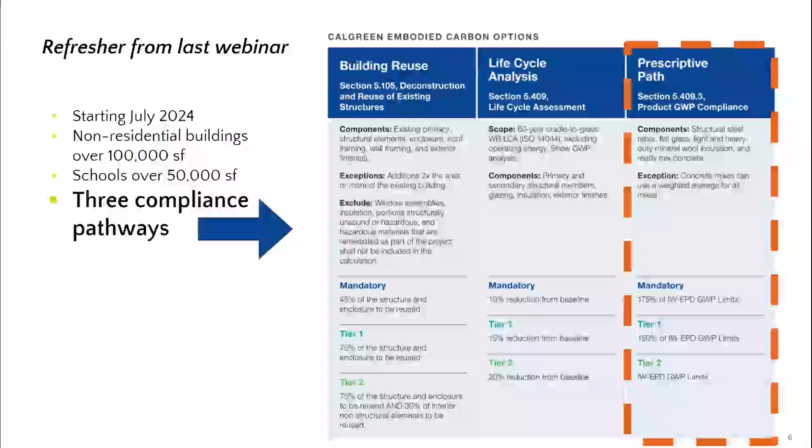So just a little bit of a refresher from the last couple of sessions. CALGreen is going to be starting July of this year, right around the corner, getting pretty exciting. It's going to be applying to buildings over 100,000 square feet, non-residential buildings, and schools over 50,000 square feet. And there will be 3 compliance pathways. So our first webinar was all about kind of an overview of the 3 pathways, and these subsequent webinars are more of a deep dive. So be sure to check those past recordings, and as well, all the resources that we've been sharing on these webinars will be saved there.

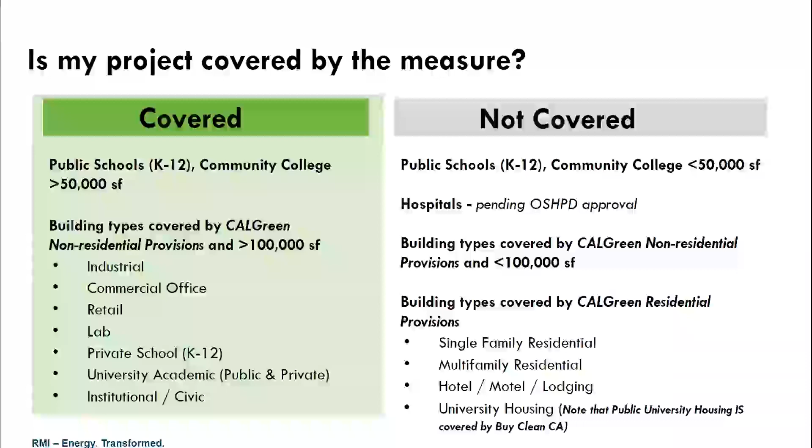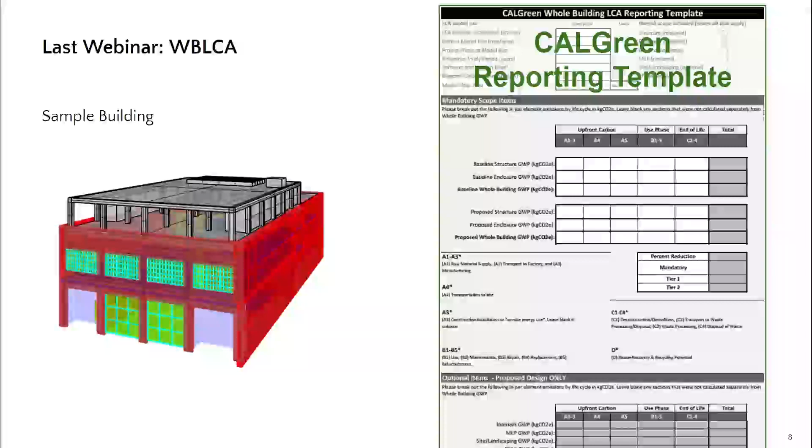In the first webinar, we got a lot of questions about what's covered, what's not covered. We continue to be developing resources with AIA and SEAOC. And again, keep referencing those pages, and there's a lot of work behind the scenes and a lot of people pulling this information together. Last time we had a great group talking all about whole building LCA, which is a topic that is definitely growing in interest in the industry, and I think with this code it will only get more and more important. We talked a lot about the reporting template required of that, and went through the whole process of how you include that in your drawings and specifications, and noting that that's required at permitting.

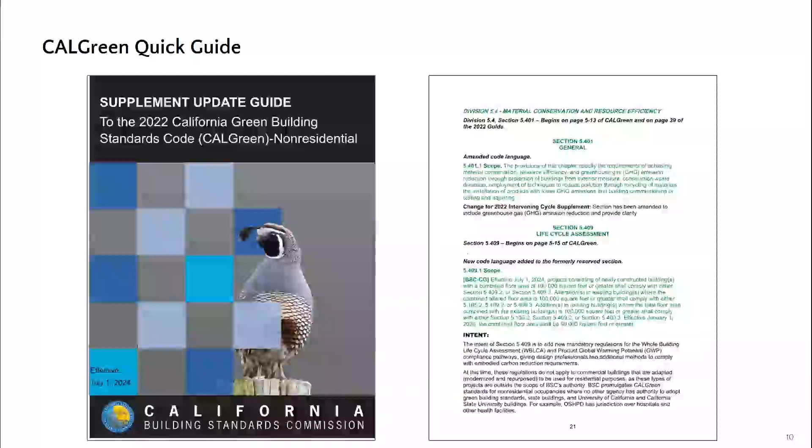Since we last spoke, there's been a CALGreen quick guide that was published. This outlines all the code language, provides the worksheets, is a really great resource. Sarah's gonna help us out and drop a link to that in the chat, I believe.

And today we're gonna have a little bit different style here. It's a little bit more freeform. We have a really wonderful group of industry experts here. And we're going to be diving into procurement strategies for the materials that are included in CALGreen. And with procurement, it's largely about awareness and collaboration between the design team and construction teams.

In that light, we have a pretty big panel of industry experts trying to cover those different materials. We have structural engineers like Salma, architects like Hafsa and Burt, as well as folks on the construction side, Jesse Buckmaster and Sophie Pinetier, with a perspective on facades. And as well, I think a really important perspective from actual material manufacturers and suppliers, Dave Wright and Jim Little. And I will say, it's a big group here, and I'm not going to go into deep detail on everyone's bios - check the event page for that, along with the other resources.

And it's going to be a little bit more ad hoc discussion here. Lots of important perspectives to shed light on this topic.

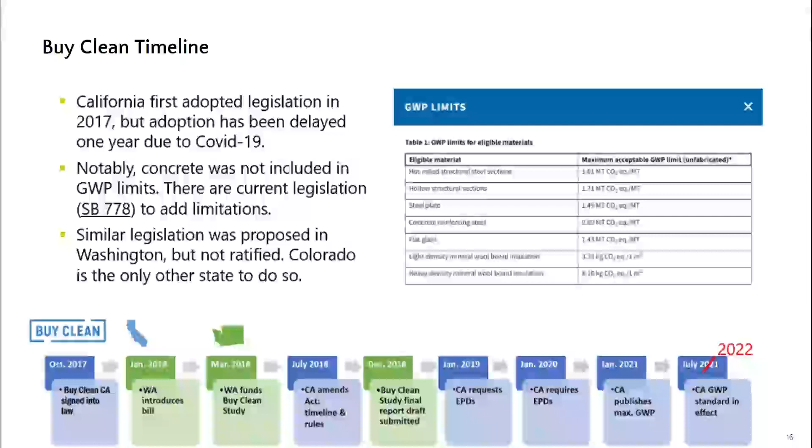If you go to the next slide. One of the big differences between CALGreen and Buy Clean is that ready-mix concrete has been added to the list of affected materials. So you'll see everything else on this slide is the same as Buy Clean. In addition, we have ready-mixed concrete. And for ready-mixed concrete, and we'll go into this much more in detail when Jim goes into detail on concrete, essentially ready-mixed concrete has a few exceptions here in the code because it's a bit more complex than some of the other materials.

Let's say you have 4 or 5 different concrete mixes on your project. CALGreen's prescriptive pathway allows you to take a weighted average of the impacts of all of those different mixes, to be able to come up with one GWP number. So you're not necessarily looking at them in silos the way you are with the other materials, just by individual element. You're looking at them as concrete mixes as a whole on your project.

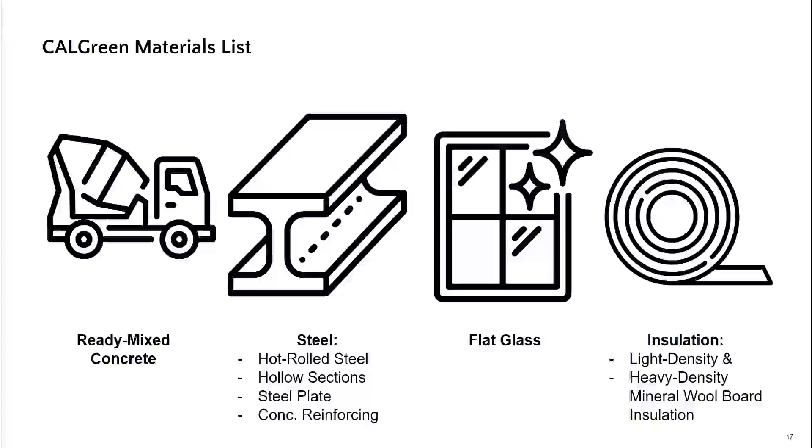So we talked about Buy Clean requiring industry average GWP limits be met. For CALGreen, the mandatory requirement is 175% of the industry-wide average EPD limits. So 1.75 times the limits that were shown in the Buy Clean slide. If I'm being honest, that's a really low bar. It's going to be very easy to meet those requirements to be within 75% more of the industry-wide average. So we suspect that this pathway is more of a record-keeping exercise than anything. We'll just need to have EPDs that prove that all of our affected materials are being produced within this 175% industry average GWP limit. And once we have those EPDs, we don't suspect it to be very difficult to meet those requirements, but having those EPDs are going to be kind of the push for this pathway.

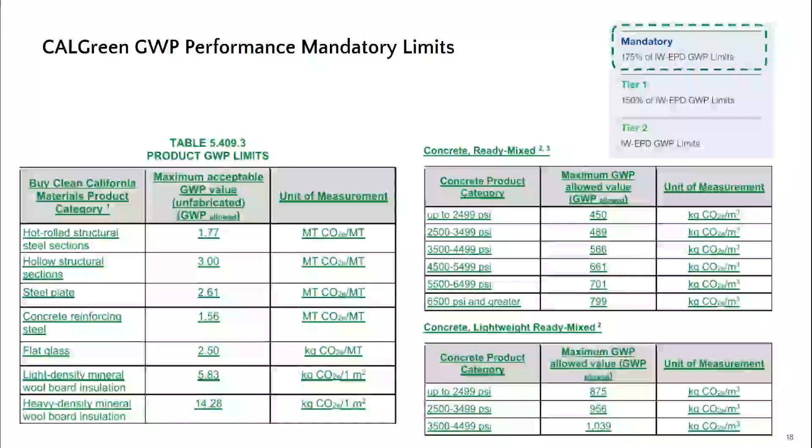So I've been saying EPDs a lot. I'm sure in the last few webinars the phrase has been mentioned and probably introduced, but to give you a little bit of an overview of what EPDs, or environmental product declarations, are - they're essentially the way that we're able to quantify the impacts of our various materials on our projects.

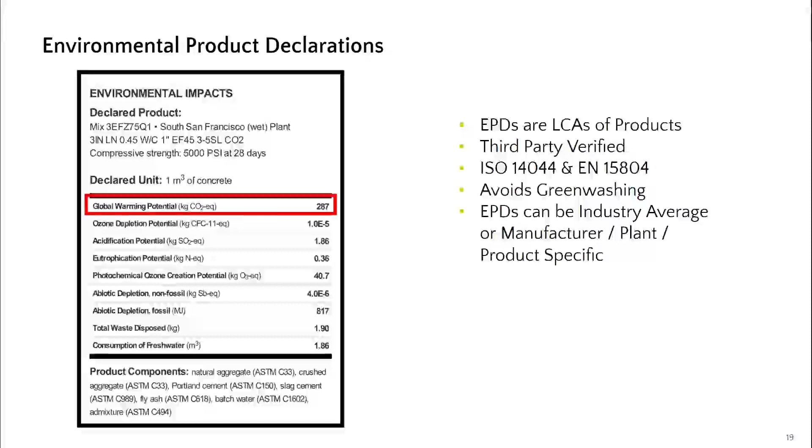We won't talk too much about LCAs during this webinar because the previous webinar was pretty heavy on LCAs, but I just wanted to note that EPDs essentially measure cradle to gate emissions - meaning the emissions associated with the product stage of a material's life, from the time of raw material extraction through the time that material leaves the factory gates. That's what the EPD is measuring.

And then the EPD data essentially gets fed into LCA tools to be able to perform these studies that we do for, say, if you were following the performance-based pathway and doing a whole building LCA.

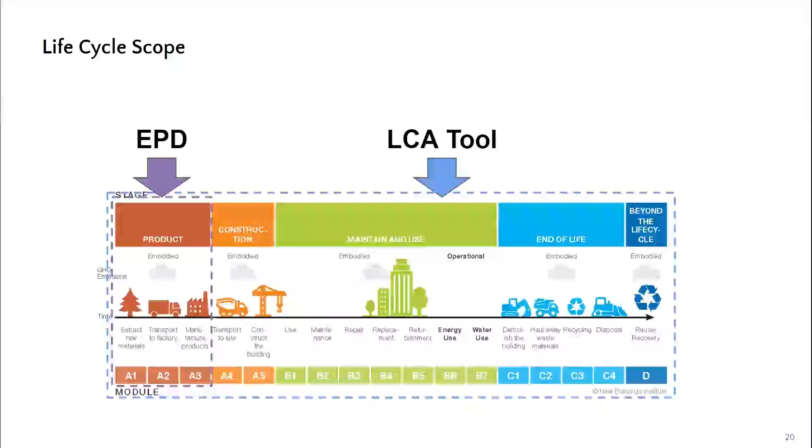So there are two main types of EPDs we want to make you aware of: industry average versus product-specific or factory-specific, which we've grouped into one more granular type compared to industry average. The industry average EPDs are developed by industry organizations like NRMCA or AISC - they collect data from their constituents and share the average impacts associated with those various materials. Whereas the product or factory-specific EPDs are published by individual manufacturers for their specific products.

So in order to satisfy this prescriptive pathway of CALGreen, you will need all of your affected materials to basically have product or factory-specific EPDs. The industry average EPDs won't be acceptable - you'll need to have product or factory-specific.

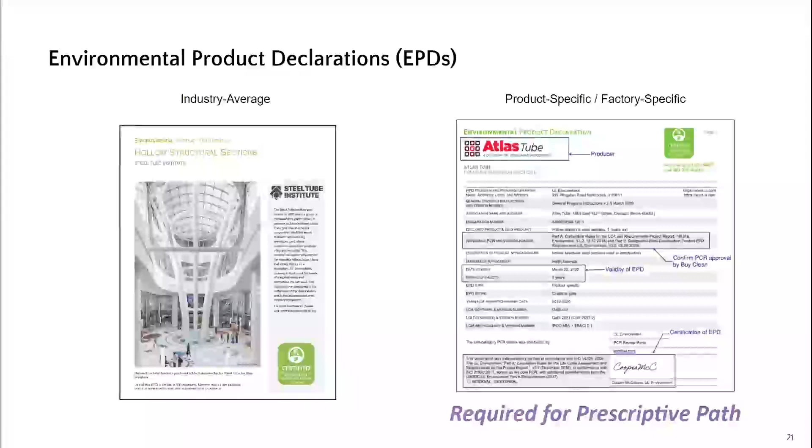I would add one thing here, a quick distinction following up from our webinar last time. I think it's really important to keep the two pathways separate - whole building LCA and the prescriptive, more like Buy Clean approach. Last time we talked a lot about reducing, getting to that 10% reduction by using low carbon product procurement - that's reduction from the baseline, from that average. What Salma has been saying is that the threshold now for the prescriptive approach is a much higher number, much more conservative - we're not reducing from that higher 175% average number. So it's important to keep those two distinctions in mind.

With that, we'll transition to a bit of discussion about the responsibility of the design team, both structural engineers and architects, requiring that there be some documentation. Similar to the whole building LCA approach, there's a worksheet to be filled out and included - and this is being done at permitting, submitted with your permit application. I wonder, Hafsa, if you could speak a bit more about this process and how you see it impacting architects and engineers.

Yeah, appreciate that, happy to be here. Usually contract documents consist of drawings and specifications, and sustainability requirements are covered in 01 81 13 of Division 1 in CSI format, if you're doing specifications. For those of us who have been doing LEED certification projects for years, we know that all sustainability requirements - like standards, if it has to qualify for South Coast Air Quality Management District for low emitting materials, etc. - all references are included in Part 1 of Division 1 of CSI.

And including the action items, like what the contractor is required to do - if he or she is supposed to submit an action plan within 30 days of going into contract, what's the action plan for procuring these materials, and then what's the process of actually documenting that these materials were procured throughout the process, tied in with progress payments. So that's one, it's detailed.

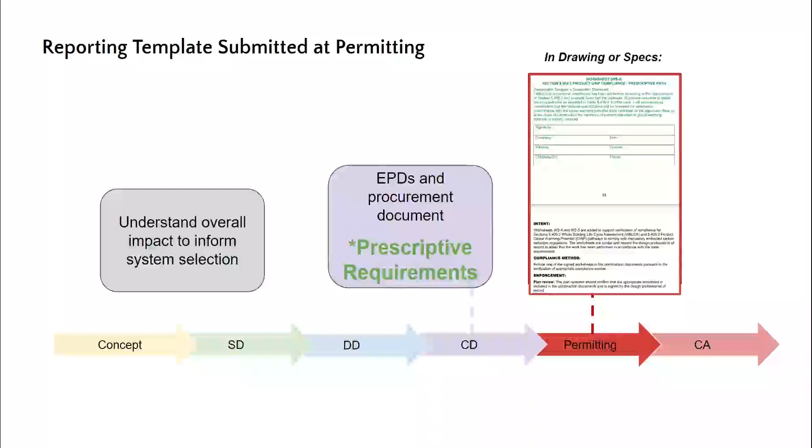Excellent, thank you. Yeah, and let's get into it. Dave, let's start talking a little bit about steel, from a fabricator role, as someone who actually is purchasing these products. Yeah, sure, Luke.

Thank you. And I'll start by saying thanks for the opportunity to come speak about my favorite building material of choice, structural steel, here today to such a great audience. So I'm going to cover a handful of things in the next couple of slides and try to do it quickly.

And you see toward the bottom, globally right now they are still accounting for about 70% of the total raw steel, crude steel produced in the world.

On the right-hand side is the newer method, really refined in the last say 100 years, the electric arc furnace, or EAF method, also known as a mini mill. Those traditionally use a very high content of recycled steel. So your bicycles, cars, washers, dryers, things such as that are going into these, anywhere from 93 to 97% recycled content, with the fill-in being other alloys added to get the right material grades and properties. You've got much less emissions being put out from these.

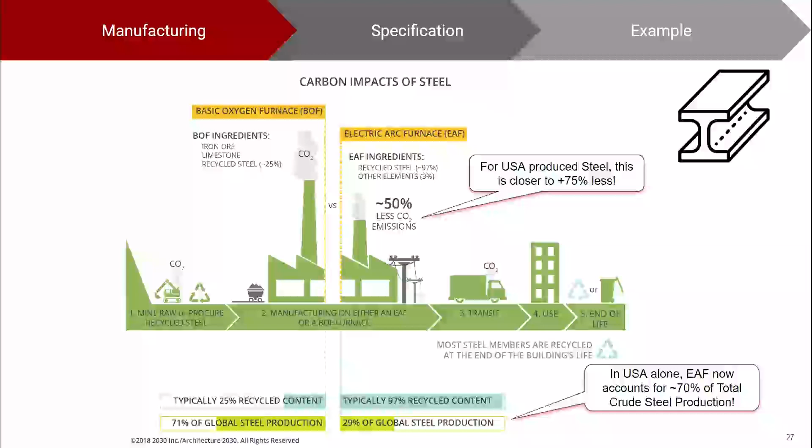So as Jesse and Salma talked about before me, what can we do when specifying materials? Consider discussing those as early as you can with your general contractor, your owner, your construction manager, and where possible, if the design team or construction manager is able, bring in and look at your local steel fabricators and suppliers in the area who might be most suited to bid on your project or supply quotes, and get their input as early as you can to help inform writing those specifications.

When you're looking at your project, we'd recommend, from a steel perspective, really focusing on what the primary materials are that make up your structure. Are they primarily going to be your hot rolled sections, your wide flange, your channels, your angles, or is it going to be a predominantly HSS or tube or pipe type project with a lot of hollow shapes, and similarly if you've got a job with a lot of plates?

Really understanding that kind of content is important, because in a minute we'll talk about how many mills are out there right now in the US producing with EAF that have facility specific or mill specific EPDs. That's another name for what Salma was describing and what Luke had described as material specific, but that term mill specific or facility specific, that's what we're looking for.

And you're going to see that for certain things, like hot rolled sections here in the US, the industry has responded well, and there's facility specific EPDs for pretty much all the big providers. Whereas on steel plate and hollow sections, there's maybe a lesser quantity of mills that have been able to obtain their facility-specific EPDs yet.

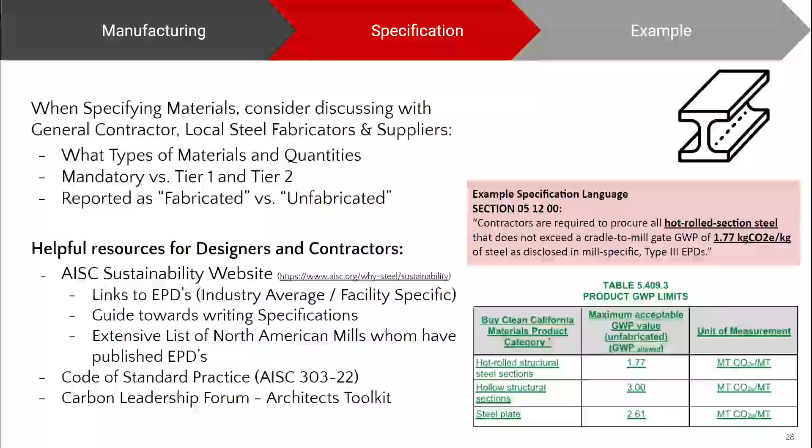All the materials, because it's one of the University of California schools, are required to meet the full Buy Clean California. Roughly about 300,000 square feet in total of new structure, with about 200,000 falling into the buildings we're providing, with about 1,400 tons of steel. Noted the lateral systems—it's a combination of concrete shear walls, BRBs, and special moment frames with RBS.

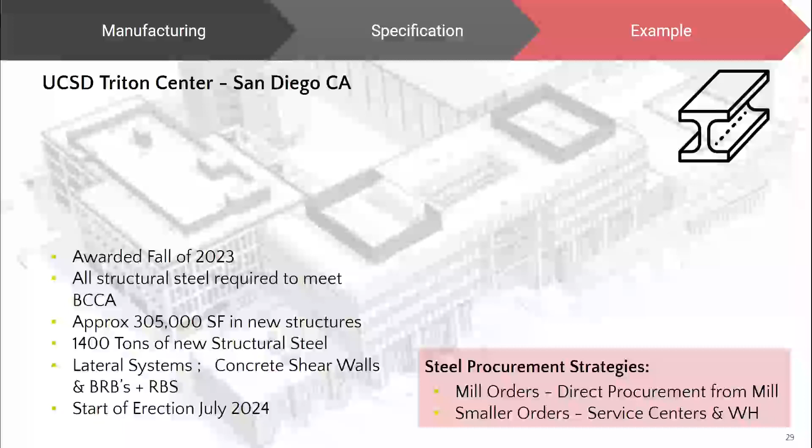What I wanted to point out on the next slide is a picture of both of the 2 primary steel buildings, the 5-story and the 3-story. We color coded these to make it stand out that all of the hot rolled structural sections—angles, channels, and wide flange—are in blue, with green being the hollow shapes, and that orange or yellowish color being the flat plate. As you can see visually, the lion's share of the steel in these jobs is in the hot rolled sections.

Again, no real challenges there when you're ordering in bulk from the mills, placing orders and being able to meet those Buy Clean California requirements. But where we really got into some challenges on this job is with the smaller quantities—the smaller plates, plates used as shear tabs and stiffeners. Normally for those items, there's not enough on your job to go to a mill and place a mill order for new material. You're typically partnering with your service center and local warehouses to obtain those smaller quantities.

Until the industry kind of flushes this out at these warehouses and service centers—where they're not bringing in steel anymore that doesn't meet, say, Buy Clean California, or doesn't have a facility-specific EPD—you're really at the mercy of what those service centers have.

So you're kind of playing the game where our steel purchasing agents, after being awarded a job, have to call up and verify what they have on hand, and can you send me the MTR so we can backtrack and see if that was produced at a place and time that had a facility-specific EPD. So some lessons learned on Buy Clean, but I think the upcoming CALGreen will offer some relief on those smaller quantities and hopefully improved flow.

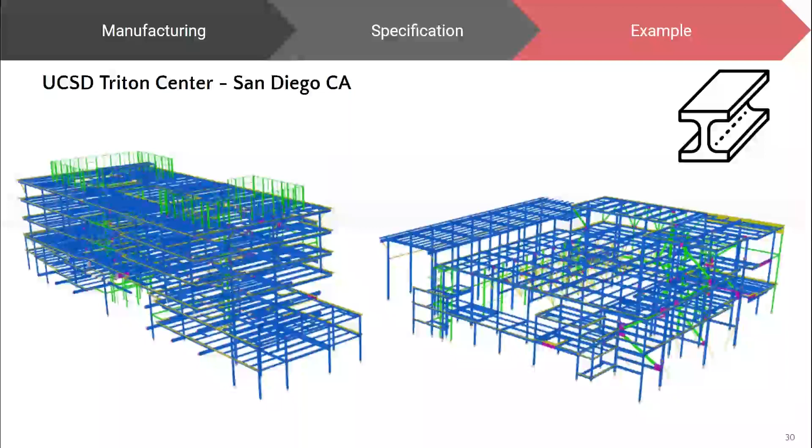It's going to be really critical, communicating those expectations early. Great. Okay, on to the next material. Jim, you're up, and thank you. I know it's a busy day for Jim, so appreciate your time and perspective on this.

Thank you, Luke. I think it's a busy day for everyone, but certainly an important topic. We've heard a little bit about early collaboration from Dave and from Jesse. As a ready mix concrete supplier, I think that's extremely important, as the capabilities of suppliers throughout the state, from north to south, the desert east side to the coastal west side, ready mix suppliers throughout the entire state and country have a wide range of capabilities, from materials, the sand and gravel they use, the chemical admixtures, the cement, and supplemental cementitious materials. All of those have a huge impact on what a supplier is capable of doing.

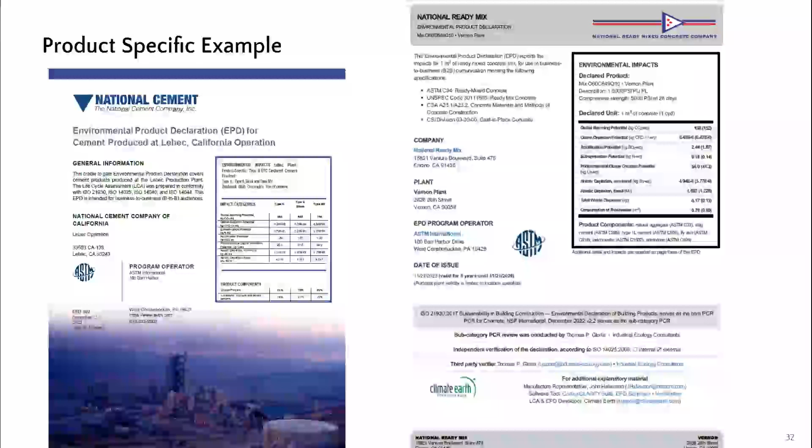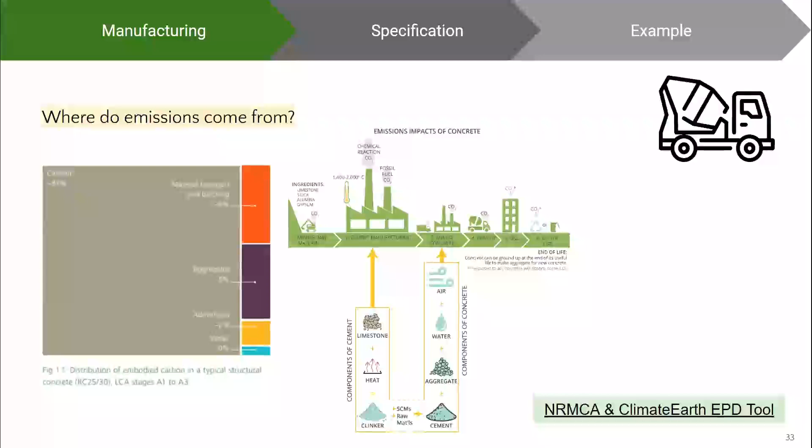With cement providing the highest contribution of global warming potential to a concrete mixture, that's an important aspect to look at. That's where a bulk of the emissions come from, that pyro process where we take the limestone and fire it in a kiln. So we need lots of energy to process that limestone to reach those high temperatures, and then the chemical reaction between the limestone releases the CO2. That's a bulk of the emissions produced in the cement making process, and that trickles down to a bulk of the emissions in the concrete.

This is just a little schematic of the cement manufacturing process, where the limestone is fed in. About 40% of the emissions come from the fuels that are used. Different cement manufacturing facilities have different options when it comes to fuels, whether renewable sources, fossil fuels, or a combination of both. Then there's the process emissions, which relate to how much clinker content is in the cement utilized. Typical type 2, type 5 cement used here in California is roughly 90% clinker, 5% gypsum, and 5% limestone, plus or minus.

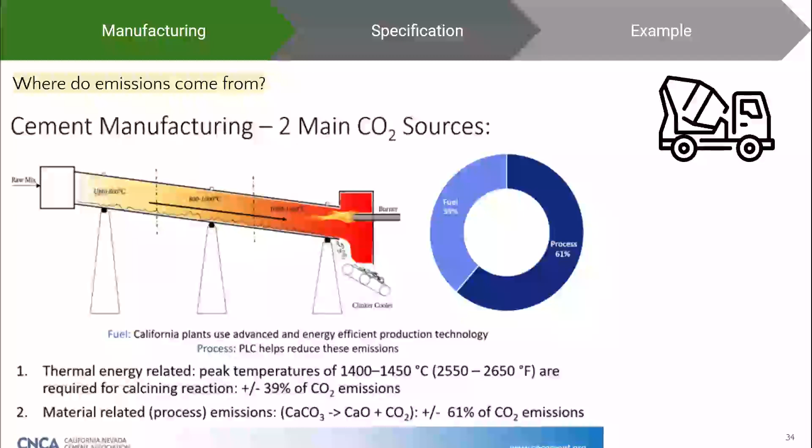When we start talking about different types of cements, blended cements meeting ASTM C595, such as type IL Portland limestone cement, those can be lower by up to 10%. So they may have a 15% limestone addition, giving you an overall 80% or so clinker content. So there's a big benefit right off the bat from looking at different types of blended cements. I think when it comes to the Buy Clean code, as discussed earlier, the limits are pretty generous, so it's real important to look at the intent of the code, which is to select a product with lower GWP impact.

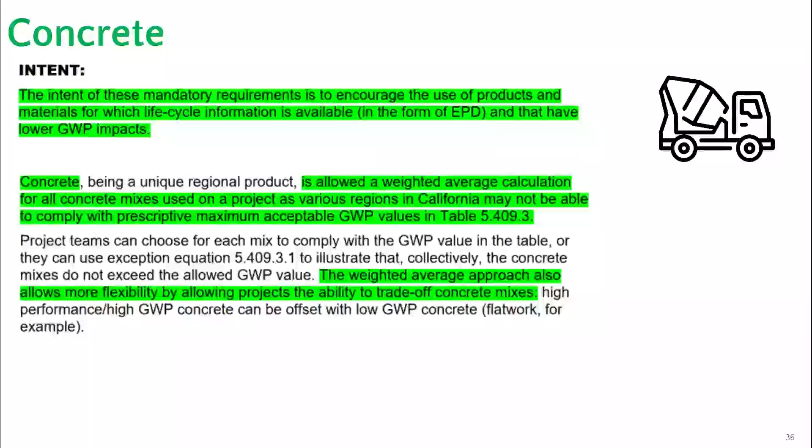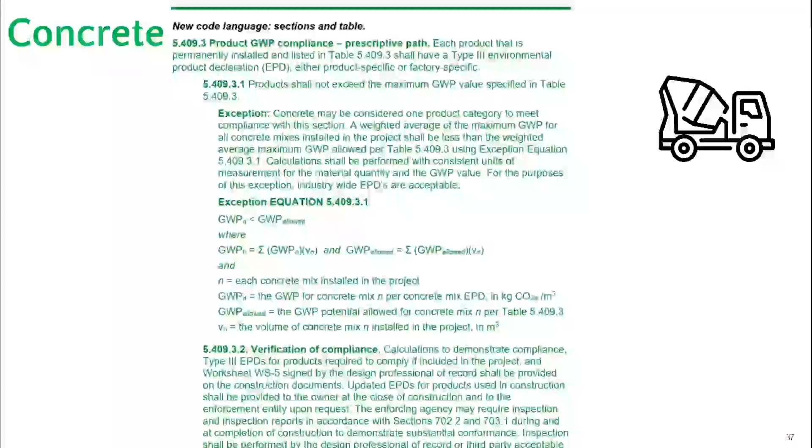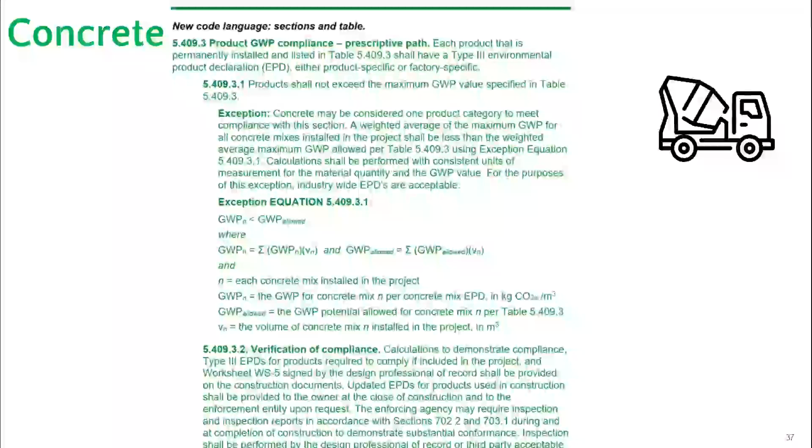I think if the intent is really the key focus there, some good things can happen. The great thing about concrete is that it's very dynamic, and we have lots of different options from various classes, from controlled low strength materials up to 10 and 12,000 psi concrete. So the ability to look at concrete as a whole using a weighted average calculation is a very beneficial option for us, and this is some of the code language here. I do have some examples of what that may look like, but it gives you the option to use the weighted approach, which really helps especially on the construction side, where perhaps there are elements that really need high strengths early on.

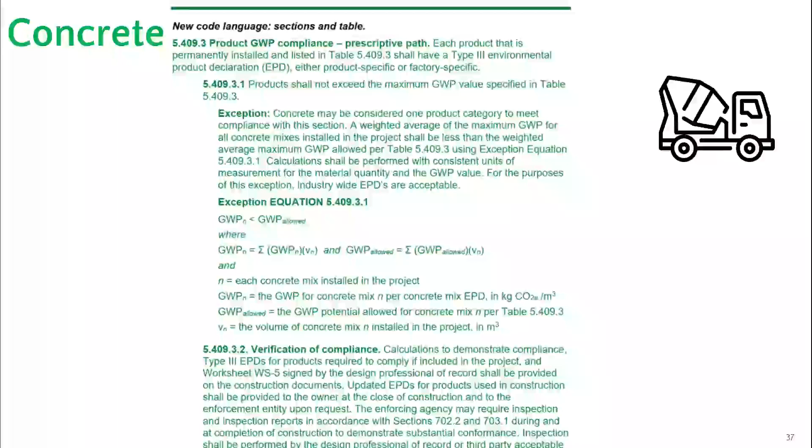And oftentimes when we do that, the GWP of the concrete mixtures are really quite elevated. Or the other side of that is if there's a specific lower water cement ratio required, that has the tendency to increase the global warming potential as well, as generally speaking, you will be using concrete mixtures with higher cement or cementitious materials.

In general, lightweight concrete has some natural lightweight materials, but there's also expanded shale clays and slates, which are pyroprocessed and do have a tendency to have higher GWPs. In addition, most lightweight concretes will have air, as air is the lightest thing we can put in there.

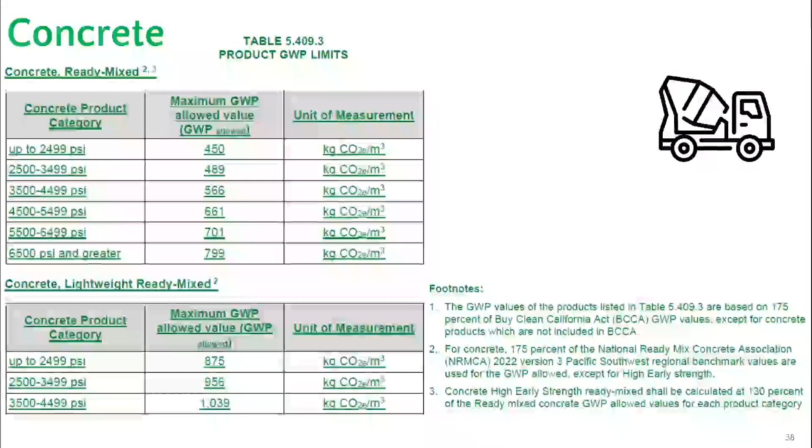And when we add air to concrete, it has a tendency to make it a little weaker, so we compensate with additional cement or cementitious materials. The other thing to note is that the product category table goes up to 6,500 PSI and greater, so as we see more 8, 10, 12,000 PSI concretes, they'll fall in that 6,500 PSI or greater table.

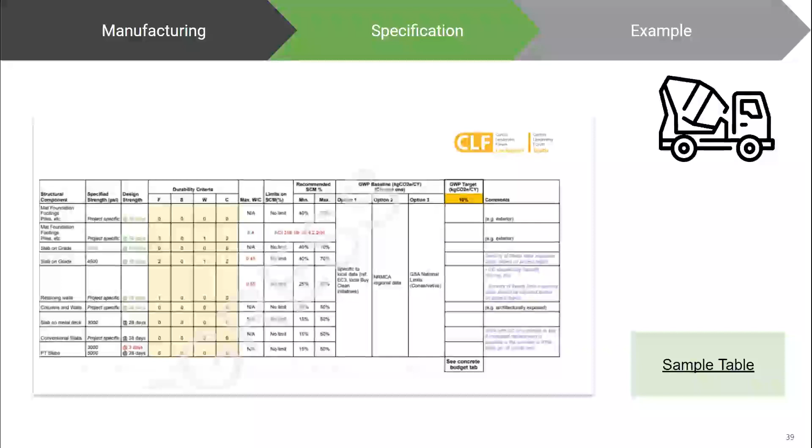So that's a great example to compare a project with CALGreen and with CLF. You can see there's lots of room there in CALGreen, but again, get back to the intent of the code, which is to select a lower GWP product.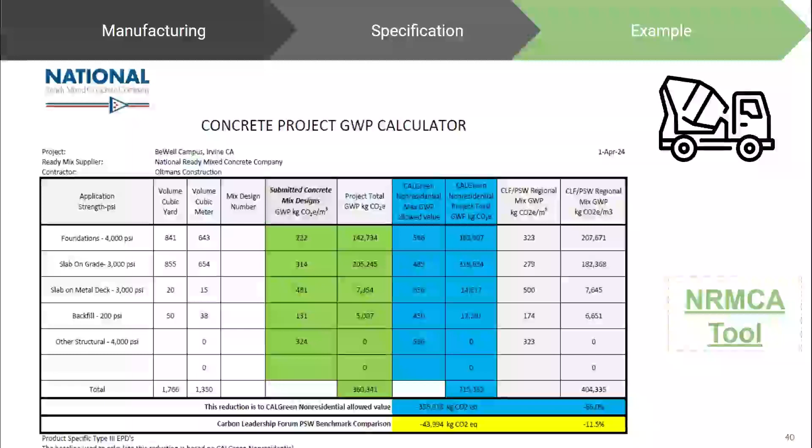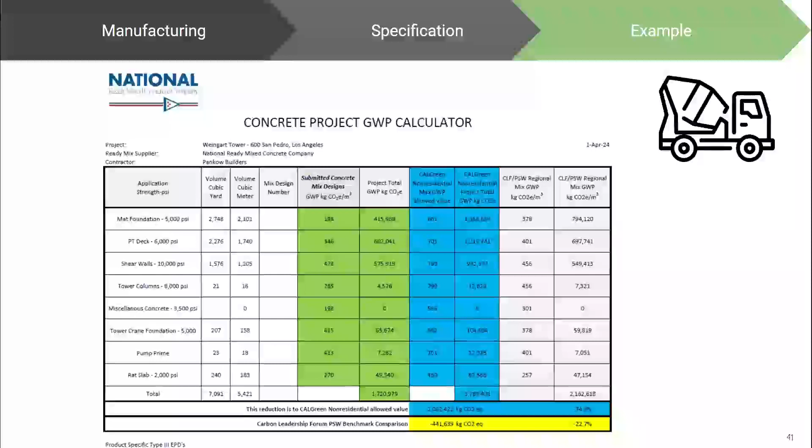And there are lots of great resources by NRMCA. There's a calculator to do this weighted average, as well as other guidance from folks like Central Concrete in the Bay Area who have good guidance on performance-based specifications. So links at the end, and next up to Sophie to talk about enclosure and related materials.

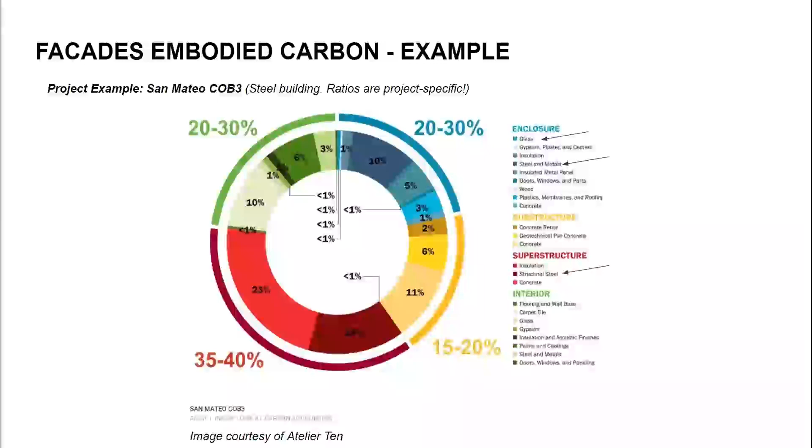Historically, facade procurement decisions have been driven by schedule, budget, warranties. This very optimized supply chain needs to be bent to accommodate carbon considerations. There's certainly an adjustment in how designers engage with contractors to develop low carbon solutions. It takes, as Jesse, Luke and everybody here insisted, early collaboration and discussing these things before they find themselves into specifications, so there's a high level of success for the solutions envisioned.

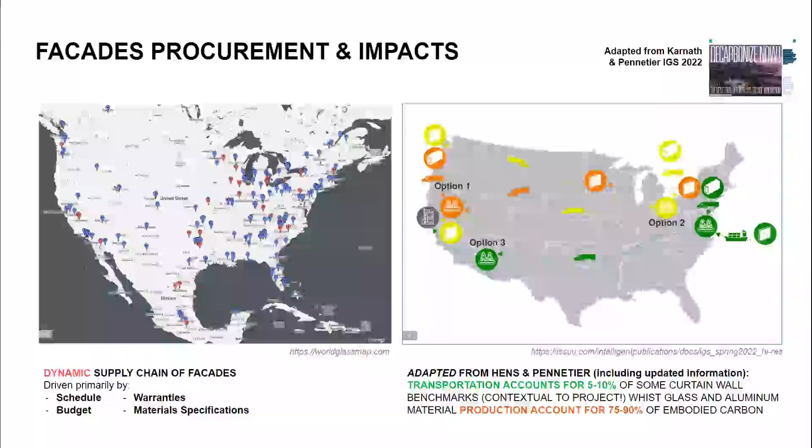What matters is going to be the materials themselves, which can represent the lion's share of the emissions. If we zoom into glass, covered by BCCA/CALGreen, it's paramount for designers to understand how glass or materials in general are produced. Architectural glass is typically produced on a float line where raw materials are melted to produce large 8 by 10 up to 20 foot sheets of glass. Those pieces are then sent to the processor, which cuts down the sheets and puts them through various processing steps that are actually excluded from what qualifies under the performance requirements of BCCA/CALGreen. For some glass products, this specific floating operation, flat glass, as defined by those boundaries, can represent 60 to 80% of the total carbon footprint of your material.

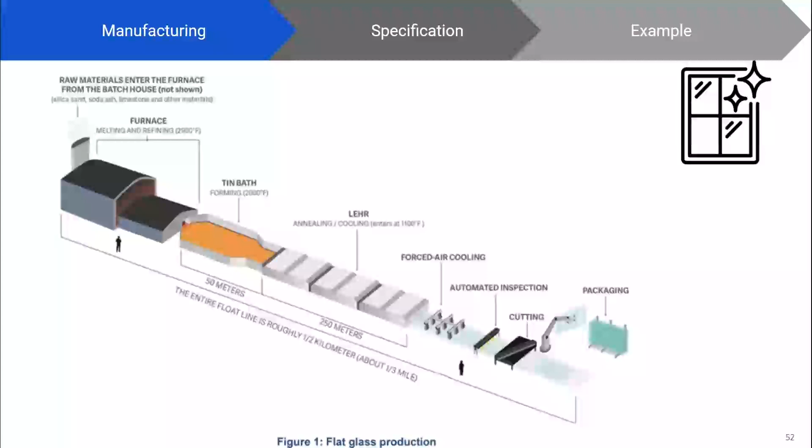Shifting back to the LCA mindset, it's still a very valid point of reference, because even your super fancy coated, triple laminated, heat strengthened glass still has the lion's share of its carbon footprint coming from this flat glass approach. That has informed the two pathways: the mindset of looking at emissions as a total LCA approach, but also the performance path. If we go to the next slide, we see what defines flat glass under the performance path. It's kind of narrow at this point. This is the current state of the code, and obviously it's dynamic and changing.

Flat glass is defined as float or rolled glass that is clear or tinted, either installed by itself or part of a window. So even if your flat glass is within an IGU for some reason, that would need to be compliant.

Processed glass, which includes all those elements I've mentioned—tempered, coated, laminated—is out of scope of the BCCA/CALGreen. The NGA, the National Glass Association, has developed documents that can help your conversations with your local authorities having jurisdiction in order to define clearly what qualifies or does not qualify as flat glass in your project.

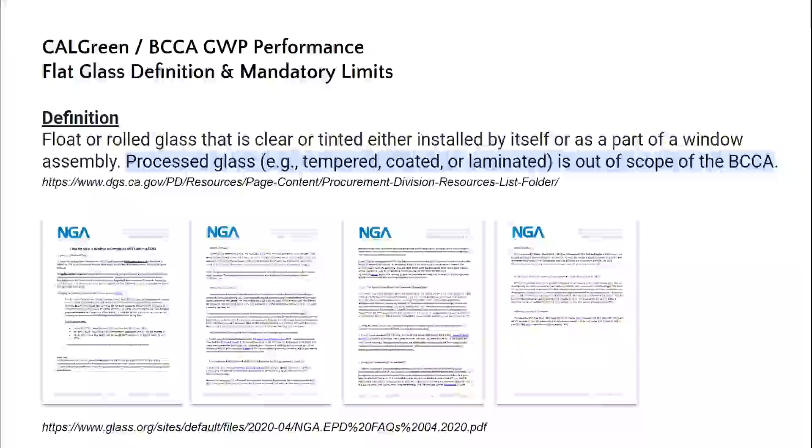It's a new process, quite recent. It is informed by where emissions come from, but there's still a little bit of language that needs to be tuned up and discussed with your local authorities having jurisdiction. So it's very important that you reach out to both the suppliers, jurisdictions, and also the associations that are there to support you.

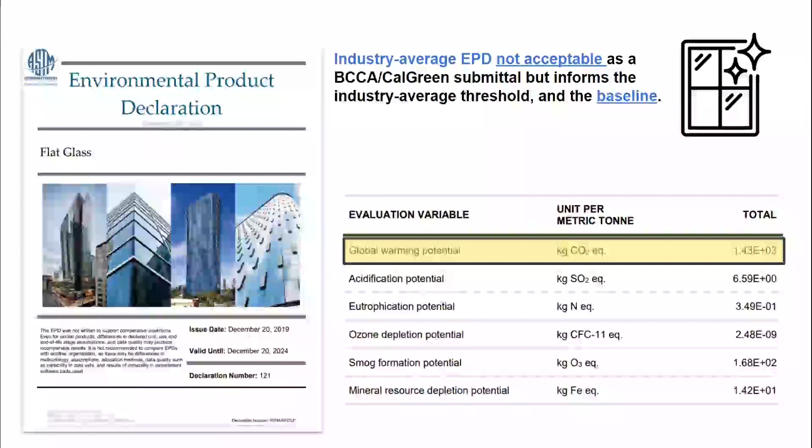In the next slide, you see what the association, the NGA, has pulled together to issue the flat glass EPD. That again is an industry average EPD. It is not acceptable as a BCCA/CALGreen submittal, but it is what has informed the industry average threshold, the baseline of what is the average of the industry. You see here, if you flip through this specific EPD, that the 1.43 figure is the average.

If you look into what's required to meet within your mandatory pathway of compliance, just the first step, the mandatory step, is extremely generous, as my co-panelists were saying—75%. So we went from 1.4 to 2.5, except if you find yourself in a project where the goal is to go closer to average.

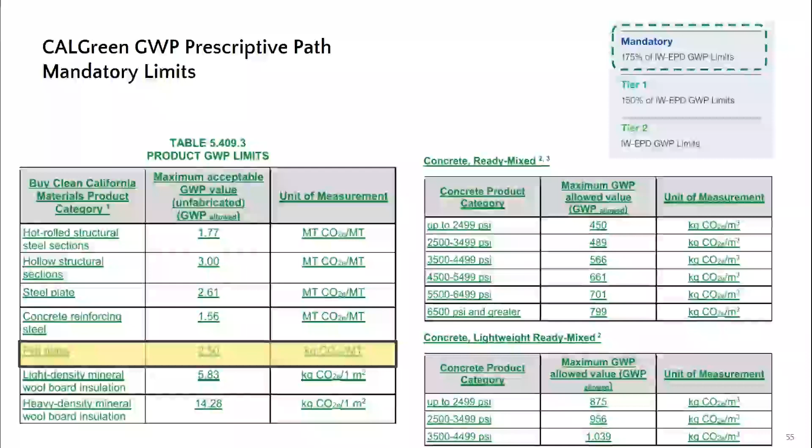I'll add one quick note here: those higher tiers are ways to indicate what the future will be. This is a starting point and a framework to work from, and we can all expect those limits to be reduced in the future, but this is how we have to start somewhere, right?

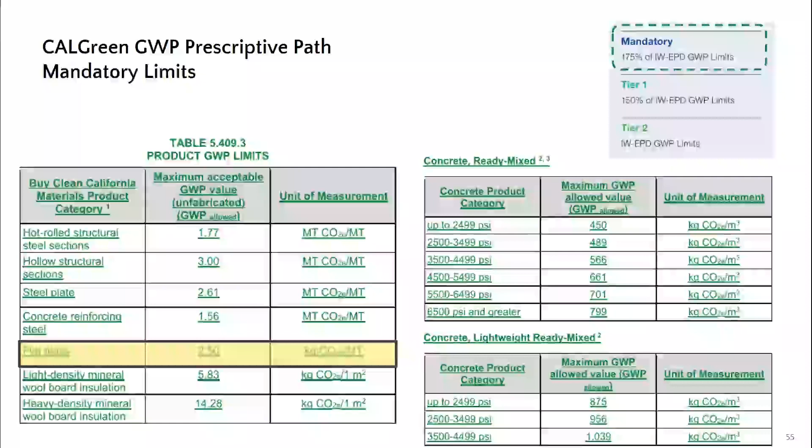Yeah, absolutely. And there are resources to see where the industry has been historically. This is a document from the CLF that is based on 2022 data. Again, like the NGA EPD, it is expiring in 2024—quite soon. We'll talk about that in a second.

This is the same for insulation. These documents give you—you may want to talk to your contractors and see if there are actually a few more data points—but the gist of it, to go quick, is that generally there are a lot of options for you to meet the requirements even under industry average.

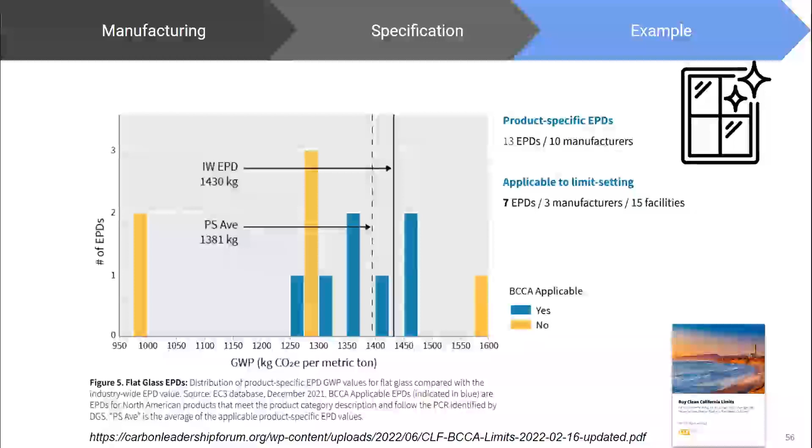If you go to the next slides, here is the approach: look at your compliance pathways. Is it going to be LCA or prescriptive? Second, look into what qualifies under the prescriptive path—your glass, if it has been processed, will not need to comply. Number three, make sure that if it needs to comply, if it's an IGU, it still has to comply. It's just the nature of flat glass.

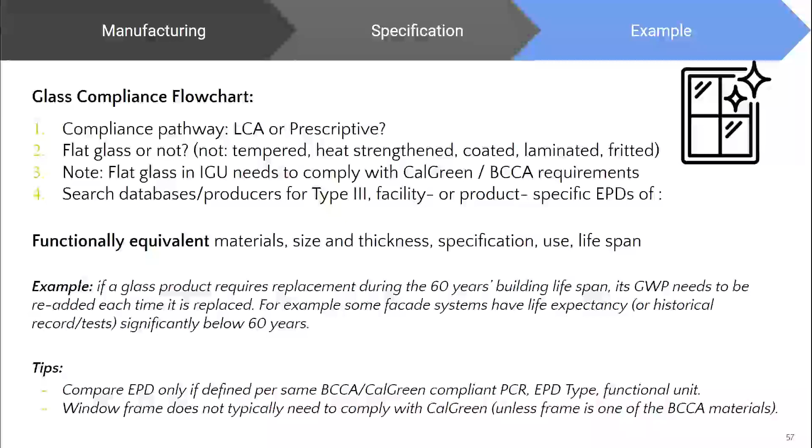Finally, once you've gone through all those checks, you can reach out to source databases that are going to be provided to you shortly in this presentation, or talk to your producers about imminent EPDs to come. Feel free to reach out—there's a lot to cover. Let's talk about insulation now.

For insulation, to be quick since we're short on time—this is what I tell my students. Most of the emissions come from when materials are in the oven, right? When things are baking is when most of the emissions are still today captured for those materials. So for mineral wool, it's going to be just the same.

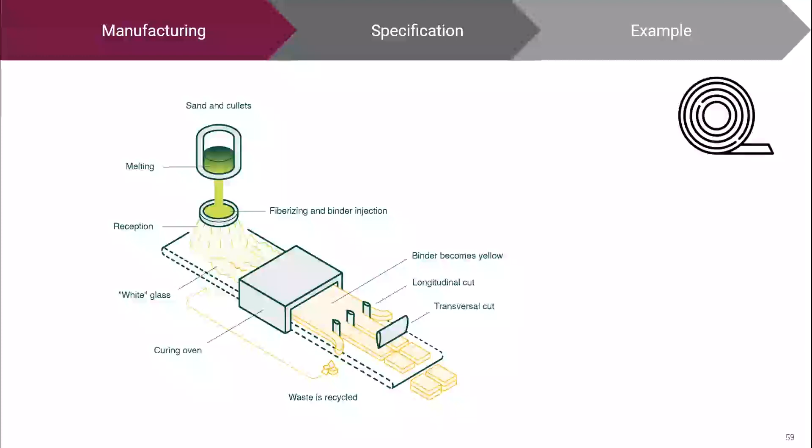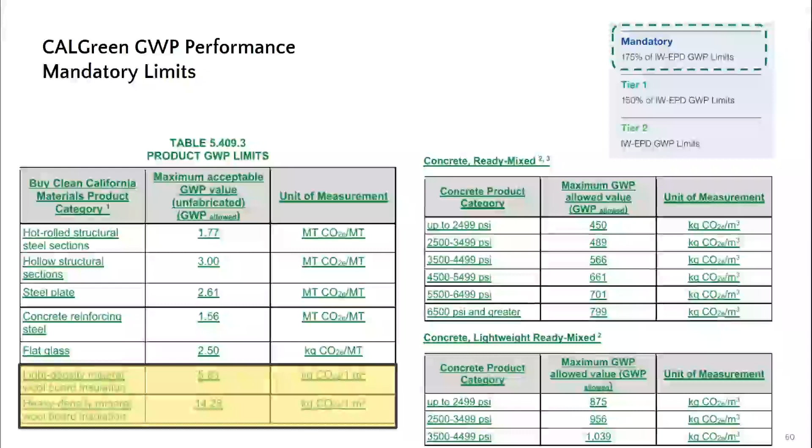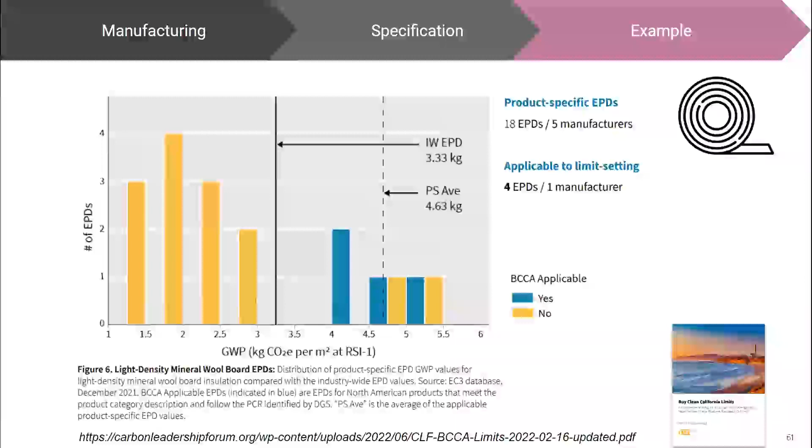The next slide shows the thresholds you have to comply with, and same as glass, these are extremely generous. In the next slides, you can see that similarly to what I said for glass, the CLF is providing a lot of resources for light density, and in the next slide, high density insulations. So there are a lot of major producers, but also a plethora of products that are complying with the thresholds.

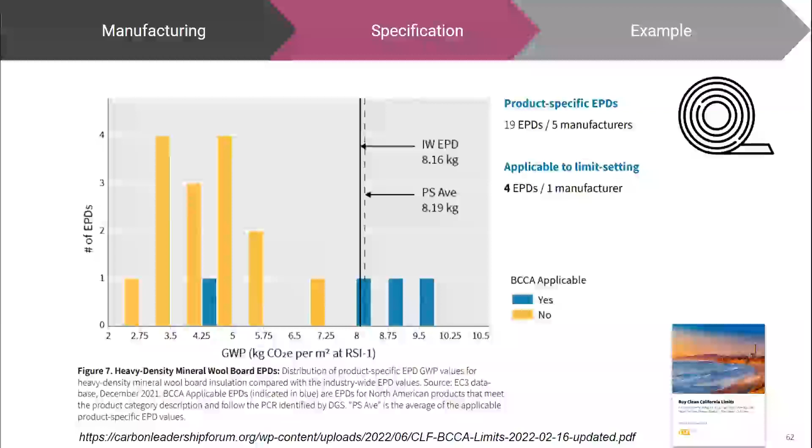My last slide for insulation recapitulates this pathway or flowchart of approach for the material of insulation, which is again to look at what the compliance is. Do you have an LCA approach? Do you have a prescriptive EPD approach?

Look also at comparing materials that have the same PCRs. Make sure the PCR meets BCCA and CALGreen requirements, and make sure it has this type 3 facility or product specific EPD requirements. That's a quick way to go at it. I'm sure there will be some questions.

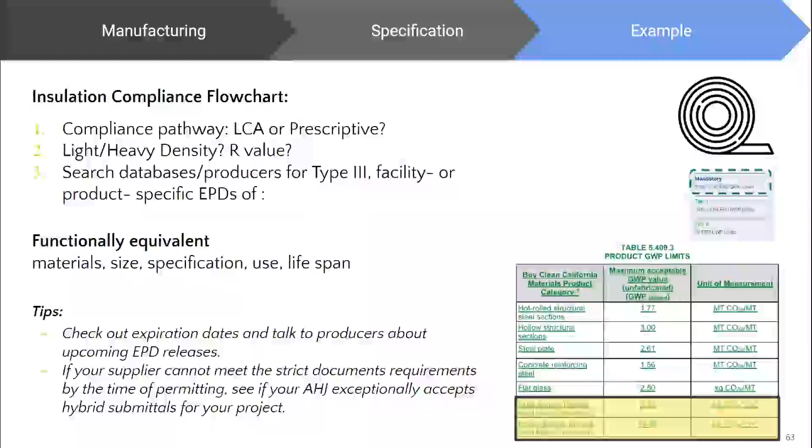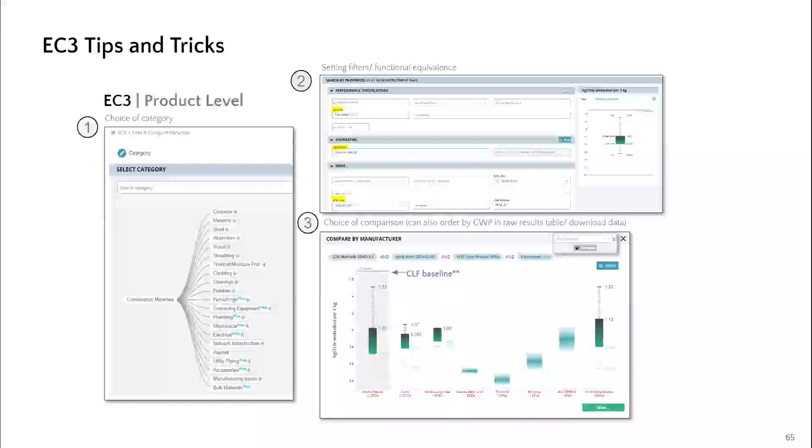We're just going to close things up here with a few resources, and share one tool that's really helpful when looking at these different materials and what products are available, and that's the EC3 tool. It's a free database of EPDs, and we'll probably have a whole technical webinar on how to use this, along with tips and tricks, but definitely recommend folks look at that.

To see what products are available, we've also compiled a really fantastic list of resources, and would encourage folks to look at it. It can be a lot of information, but I think the important piece here is really about awareness and connection, and just talking about this.

I am extremely grateful to all the panelists here, who I've known or met through embodied carbon work, and find it gratifying to learn about where our materials come from. I'm really excited about the steps already taken. This, particularly the CALGreen procurement or prescriptive approach, is already an indicator to the industry for companies like Nucor to invest in a future where their manufacturing processes are decarbonized. It's also exciting to see just last week there's a lot of funding from the DOE, $500 million to Nucor, and I think $6 billion overall, something like that, to drive down these emissions and continue to move the needle.